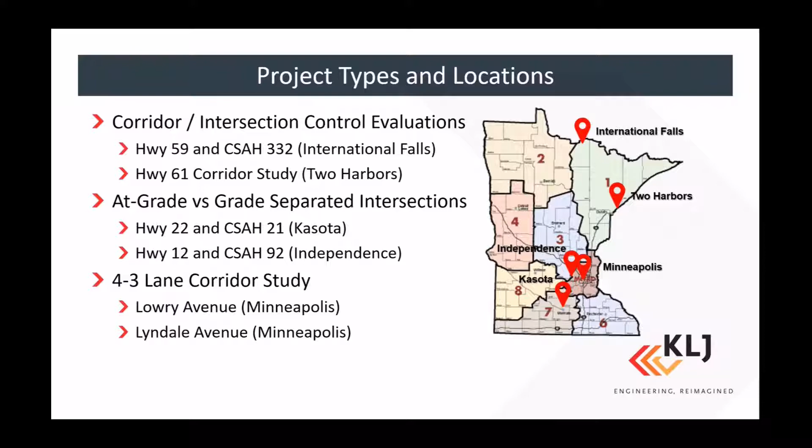And then we've also used it recently on a couple of 4 to 3 lane conversions, really quantifying the benefits of that 3-lane conversion, where we're actually seeing a lot of midday or off-peak benefits, just getting those left turns out of the main travel lanes, and we're actually seeing less delay that offsets some of those peak disbenefits to vehicular traffic. So with that, I'll turn it over to Austin to walk through some of our data analysis.

All right, so for 24-hour analysis, we have to have 24 hours worth of data at least, but FHWA recommends 48-hour counts for most of our rural studies, which is about 90% of our studies, because they don't have a lot of automatic traffic recording, which is mainly in our Twin Cities area, which is your automatic detectors and cameras that are there 24 hours, 365.

So we set up video counts for 48 hours throughout Minnesota, North Dakota, South Dakota, Montana, and Colorado, which is our market area. We also have to take into consideration events, recreational peaks, and trucks. This example is for our northern Minnesota one in International Falls. We had a lot of winter logging routes coming out of there.

Oh, there's the pointer. Okay, a lot of logging trucks going out of this east side. This lower right is all the logging. Between these, this is logging, this is all other trucks, and then this is all the rest of your daily traffic.

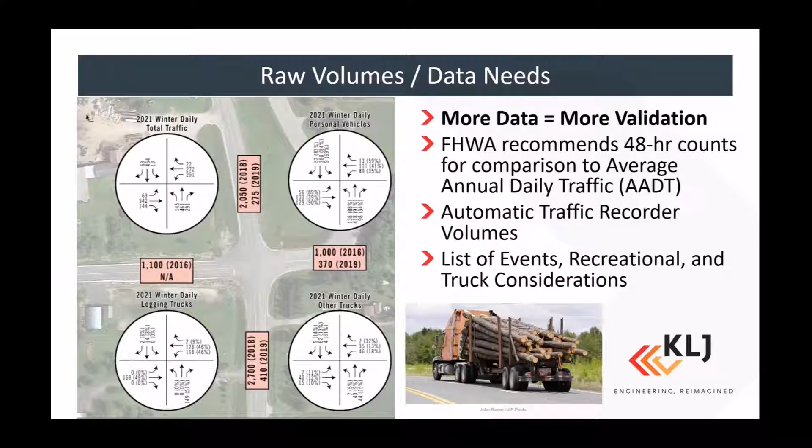And next slide. Okay, we also collect our StreetLight data to implement seasonal adjustments where we can't do it in the field. So you collect a year, up to 2 or 3 years sometimes, and we usually bin it into monthly bins and see how it differs, between 32% below and 32% above your average annual daily traffic here.

And we also quantify it between your 2019 pre-COVID and current, depending on your rural versus your urban. They definitely have different demands and definitely have different patterns depending on where you are in the state and in the nation.

Next, one example of our validation for StreetLight: we had counts in 2017, March rather. We saw a high number of westbound right and southbound left traffic, and we compared it to 2018 to 2021. We had to realize that this high number is from a closure of a bridge back in 2019 where there was flooding in southwestern Minnesota. So we had to bring these numbers quite down to match our StreetLight data, which was more in the 800, 900 versus your 1600.

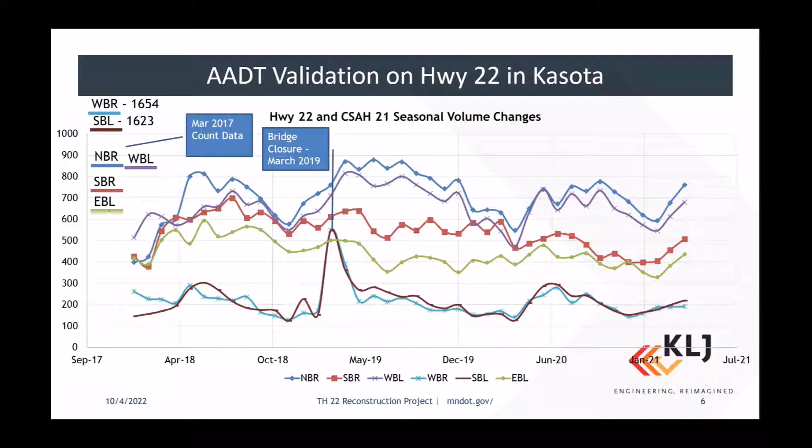Next slide. This is our spreadsheet that we input into Vissim with your hourly on top and our nodes on the left side, all your turning movement counts broken down by your intersections. With this specific project, we had some peak hour counts in field counts, and this had a full 13-hour count, and then we implemented StreetLight, which is your yellow, to complete your data set for this 13-hour project Vissim model. And along with getting your counts, we compared it with our MnDOT ADT to see if it's higher or lower than what MnDOT says it's normally at.

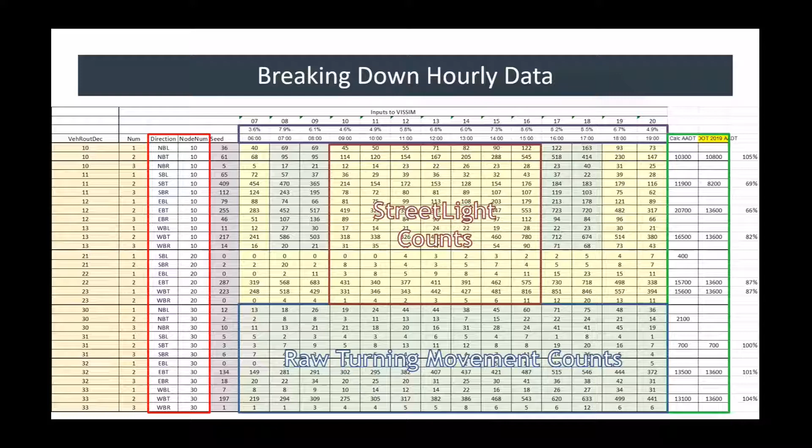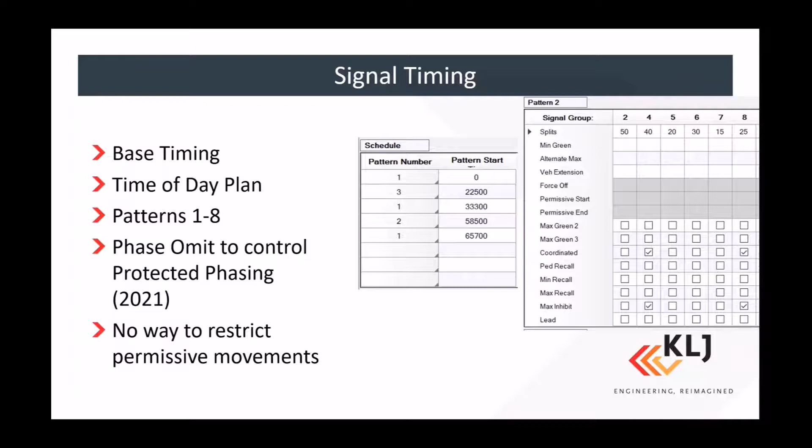We also are implementing different phasing for left turns throughout that daily period. And so that's a little bit of a clunkiness in Vissim right now, where you can't change between having protected and protected permissive throughout the day. It's always got to be protected permissive unless you're kind of tricking the model with priority rules to restrict those permissive movements during specific times. So we talked a lot with the PTV team already about that. Hopefully a future version addresses that and makes it a little easier to move between protected only and permissive.

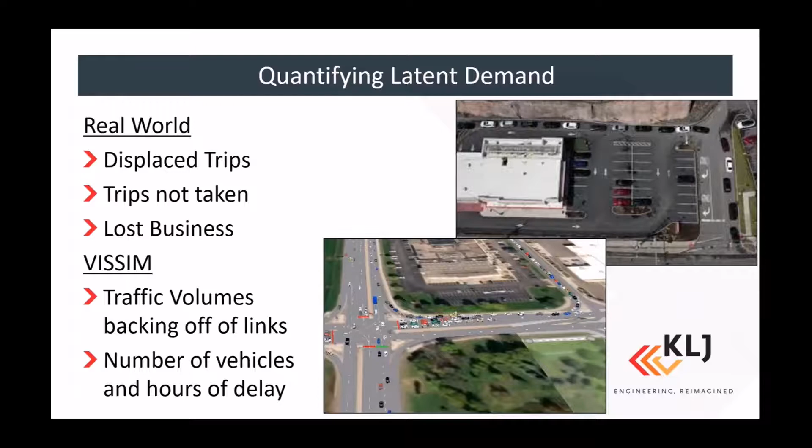So how are we kind of using this 24-hour model? Latent demand is a big one, where we can see going from existing to future conditions and quantifying what that latent demand is in some of our static vehicle models, and really looking at what the constraint points are going to be in a lot of our corridor studies. In the real world, the latent demand represents displaced trips, trips not taken or lost business, but in Vissim, it's really backing off of those links, not getting into the model during certain periods of the day.

This was one of our major corridor studies up in St. Cloud, where we ended up having a lot of displaced trips just because our corridor was at capacity, and we really wanted to quantify what that existing capacity of the corridor was and what the latent demand was going to be funneling into it over the next 20 years in our analysis.

And so we also have to look at where this micro simulation 24-hour process is important to implement. When we're looking at a macro simulation, or Synchro or Vistro, or in this case Rodel, we're really looking at that volume to capacity under 0.8 or 0.85, where we're in that level of service A to C range. A deterministic tool like that usually gives good results, but as you start getting into situations where you have a peak hour factor pushing it over that, where you're getting closer and closer to capacity, that's really where micro simulation shines and where Vissim really shows some benefits.

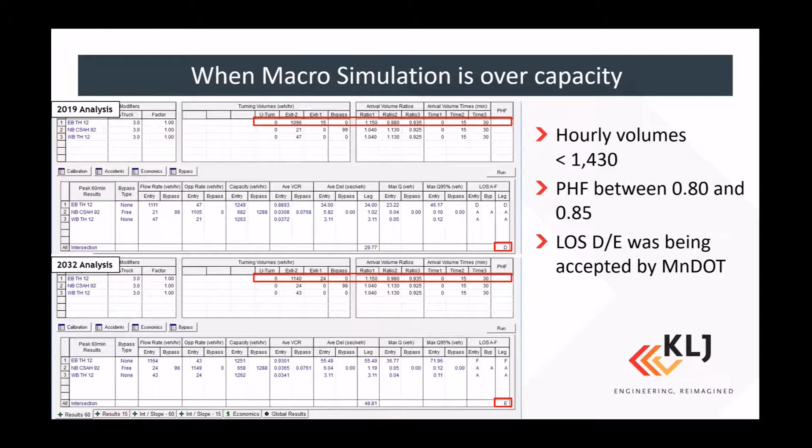In this instance, our Rodel results were actually showing level of service D for the hourly results, level of service E for the 15-minute results. And MnDOT was taking that as acceptable to implement a single lane roundabout. However, when we took a look at the comparison between Rodel and Vissim and the differences between micro and macro simulation, because Rodel was modeling that volume over the capacity threshold for that 15-minute period, it was just averaging the 4 time periods. It was under that level of service F capacity, in that D to E range, whereas in Vissim, once you hit that breakdown capacity, it limits your capacity so that all of that additional volume ends up being latent delay throughout the rest of the period.

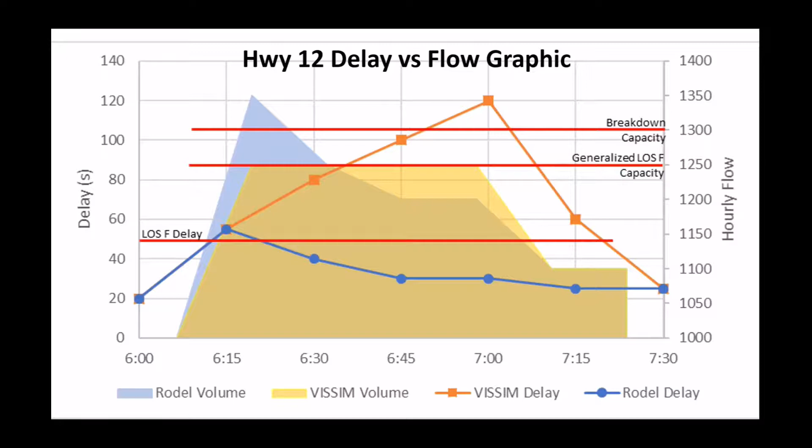And so we were able to work with the stakeholders to understand that this 2-lane highway was going to have some of those queuing effects with the implementation of the single lane roundabout, and that we'd likely see more delay during that AM peak hour. Just being able to visualize that with stakeholders, we ended up getting a second lane through this roundabout in our eastbound only direction, and really showed the benefits of that over the next 10 years.

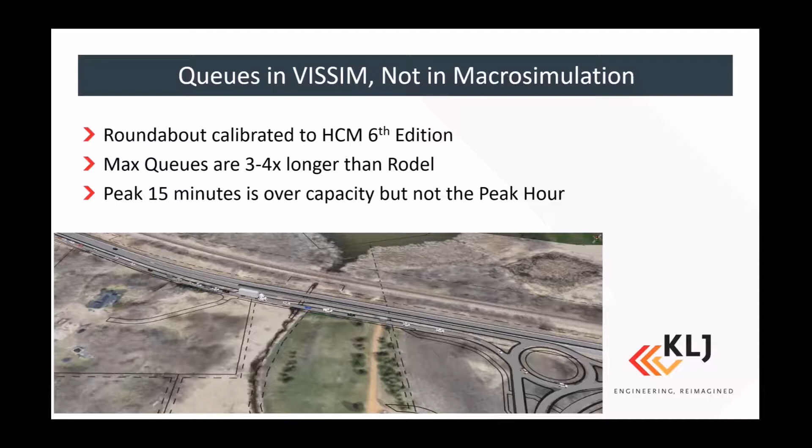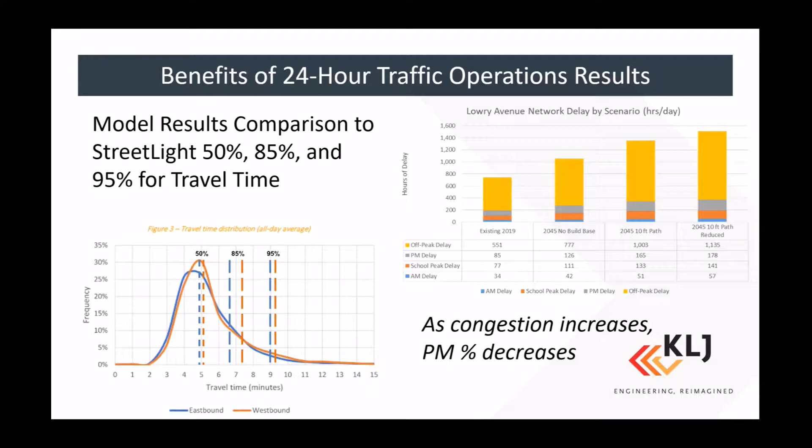But when you start looking at the amount of delay happening in the average results throughout the day, we found that the peak hour results were only about 20% of the delay that was happening on that 4 to 3 lane conversion project. And there was a lot of benefit through delay reduction throughout the rest of the day, or at least mitigating what was added if we were going to those 3-lane sections, adding in our multimodal, trying to limit that delay increase during those off-peak hours as well.

As I said before, we have been looking at using this for SSAM as well. For SSAM, comparing it against crash rates, it's a lot easier to do on a daily level. During peak hours, you get anywhere from 15 to 25% of your conflicts happening within a peak hour versus the number of conflicts happening throughout a day.

So in a lot of our VISSIM models, we're really looking at the 3 main types of intersection conflicts: rear end, angle, and sideswipe. Really looking at how we're addressing those with our specific alternatives. And so for the signalized models, we're looking at what's safer: a protected phasing, protected permissive, or permissive phasing. For rear ends, whether we're implementing signals, roundabouts, how we're reducing congestion in the model.

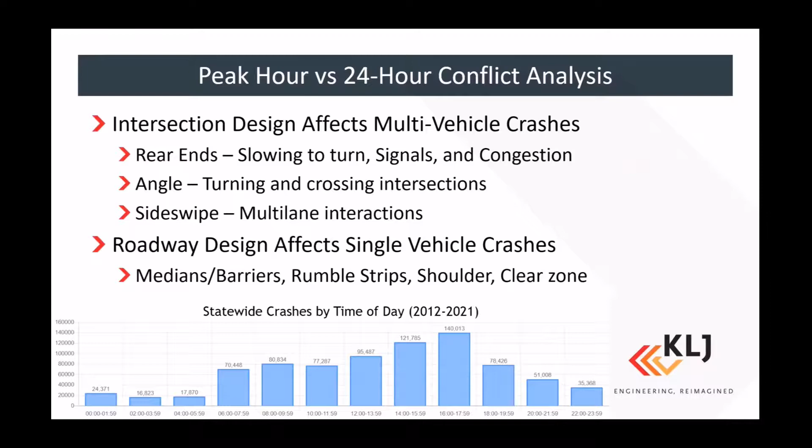And then sideswipe for the 4 to 3 lane conversions. If you're going from a 2-lane link to a 1-lane link, you're reducing a lot of those sideswipe type crashes. And so when we're looking at a 24-hour period, we're actually seeing a lot of benefit during those off-peak hours with roundabout intersections.

And so we've done this as a way to kind of help justify roundabouts and give more of a site-specific benefit to roundabouts, even 2x1 roundabouts, where we're actually seeing decreases in conflicts, whereas you're also going to decrease the speed of those conflicts, lowering your severity rates at those intersections.

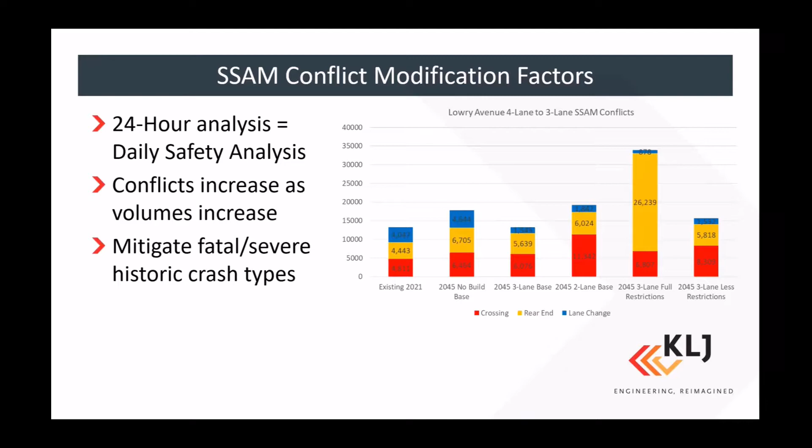And so looking at, being able to mitigate those fatal and severe crash types, we can look at those specific crash types that are decreasing, the crossing conflicts being the most severe, followed by rear end, taking some of that existing data and really have a crash cost associated with each of those CMF reductions for crossing, rear end, and lane change in each category. And so all that allows us to bring it into a benefit cost analysis.

And so instead of trying to take peak hour results and manipulate it into daily results, we have all of that operations and safety benefits, VHT, delay, and we can bring that directly into a daily. If we have different scenarios, we can match up those scenarios with their frequency throughout the year, and we can create a very detailed benefit cost analysis that we can then submit to USDOT or MnDOT as a comparison between projects and really justify these projects.

One example here was the International Falls one that had a lot of truck traffic. We didn't have a high existing safety issue at that intersection. We instead had to look at a 90-foot logging truck not stopping at a stop sign, because if they stop, they have twice the acceleration time to get across that intersection.

So they were making a decision about 50 feet back from that stop sign if they were going to go through or not. And just the interaction of a logging truck and a 60-mile-an-hour state highway vehicle was enough to justify the kind of proactive safety benefit of the roundabout intersection.

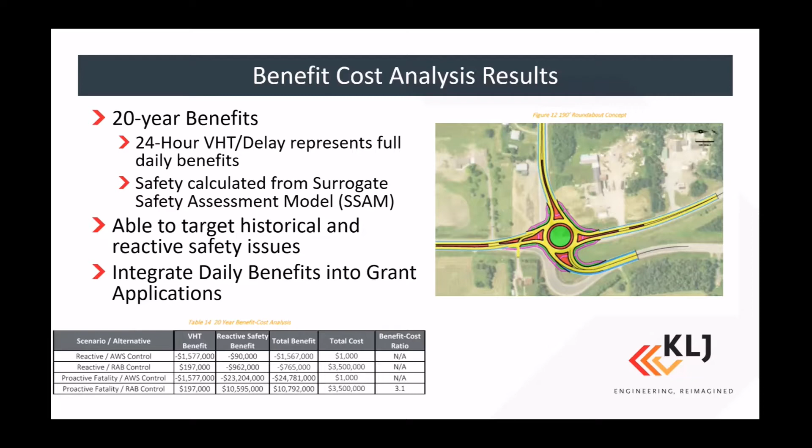So just in summary, we've found that it's about a less than 10% increase in time going from 2 peak hour models up to a 24-hour model. And really that is only having one model. Working through, as Austin was showing with the volumes, where we do kind of that first time period, and then we're able to kind of pull those equations to the rest of the 24-hour models.